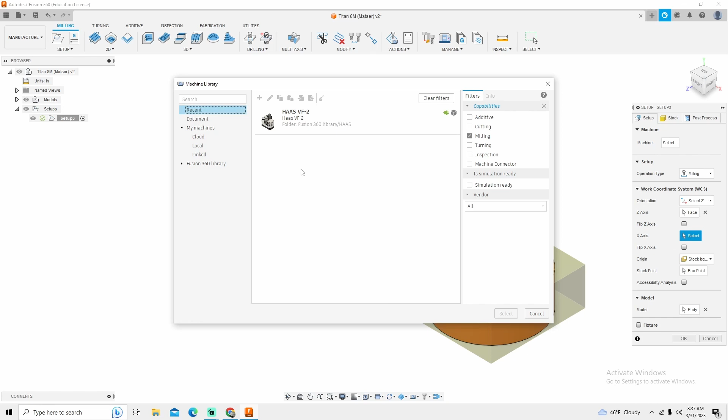Once I've got that done, I'm going to select a machine. Now, I've got a machine in my recent because this is the machine that I always use for demonstration purposes. But once you have that machine selected, it's going to ask you to download. Once you get that machine downloaded, it's going to prompt you to save that machine in your file location, and then you'll be able to see Haas VF-2 right here.

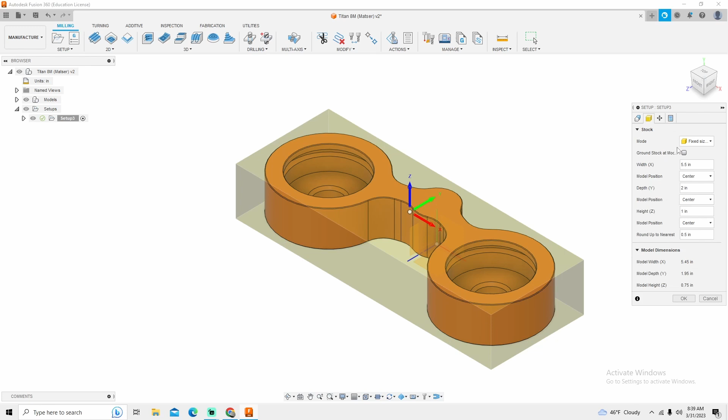We're now going to work over into our stock tab. We're going to go to fixed size box instead of relative. It's telling me that I need 5.5 inches of material by 2 inch by 1 inch. The only thing I want to verify is make sure I got material on the ends.

Once I've done that, I will then go down here to model position, offset from top, and I will change that to 20 thousandths. If you've watched my other videos, this is pretty much the same thing I do for every single part. That 20 thousandths represents 20 thousandths worth of material on the very tippy top of the part.

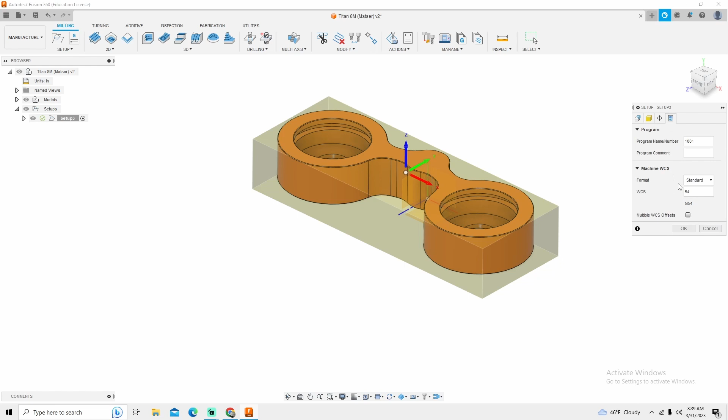Now the next thing I'm going to do is go to my post process right here. I'm going to change this program to 8000, and I'm going to call it Titan 8M. Then my format is going to be standard. Standard is your G54, G55, G56, G57, G58, and G59. And then extended is what we call on the Haas our P series, so G154, P1 through P99. So I'm going to stick with my standard G54 because I don't need anything else.

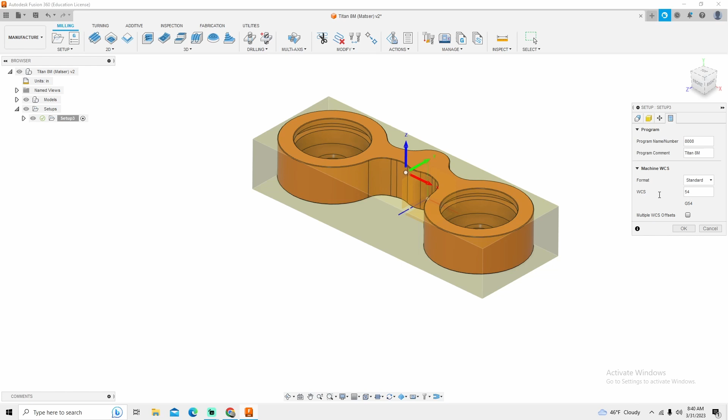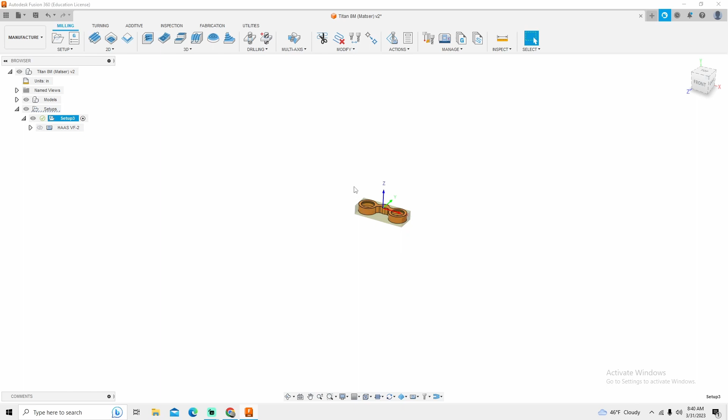And I will simply click OK. Once you click OK, if you imported the machine model, it will bring the machine model in. Now this is not the complete model. You'll have to go import a vise and everything else into your machine setup. But for the day's demonstration, I am just going to turn that machine off and continue on with the CAM process of this part. First thing that we're going to do is we're going to face the part off.

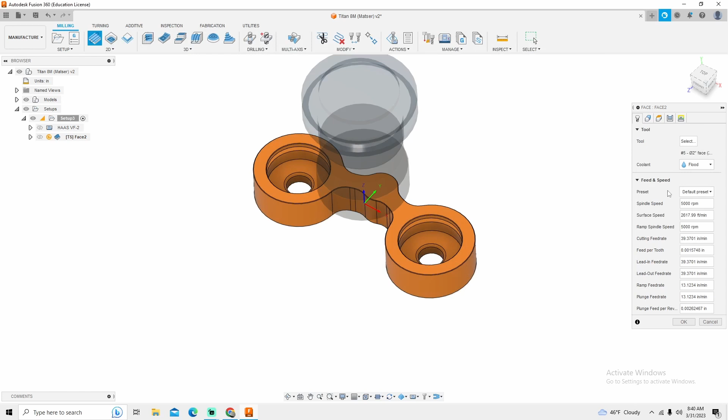So up in the facing tab, the tool that we're going to use is a 2-inch face mill that is located under the Fusion 360 library tab under milling tools. 2-inch face mill is the only one that Fusion uses. Mash select, and then we're going to change the spindle speed to 3500 RPM and a cutting feed rate of 40 inches a minute. Now 40 inches a minute on the face mill that I have at 3500 RPM will give me an almost mirror finish. Your mileage may vary depending on the kind of face mill that you have.

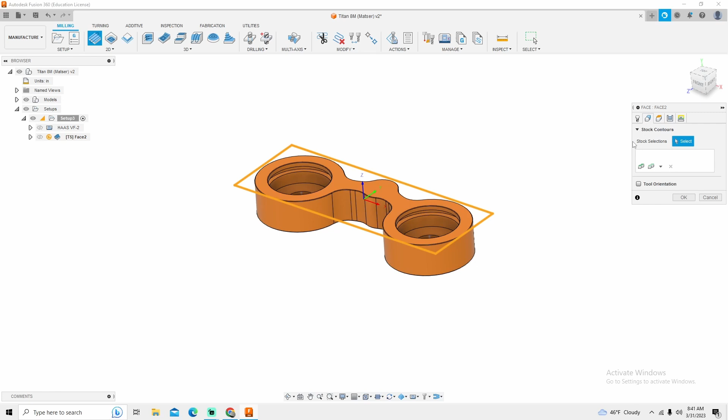Under the geometry tab, there's nothing I have to do. Same thing for most of these, except today we're going to talk about the heights tab a little bit more than we have in the past. So the way Fusion defaults is it'll give you a clearance and it'll give you a retract point. I don't like this. I like my tool to come down knowing it's only going to be 100 or 200 thousandths above the part.

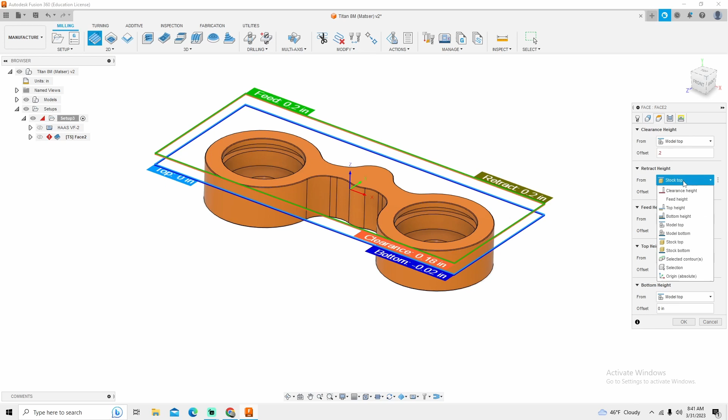So on my clearance plane, I will change this to model top, and I will change this to 200 thousandths. I will also change my retract height to 100 thousandths. And then I will also change my feed height to 100 thousandths. This tightens everything up. Now I do realize most people don't like this approach, but I do. So after I do that, the only other thing I have to do is basically just click OK. The machine control will take over and it will face the part off.

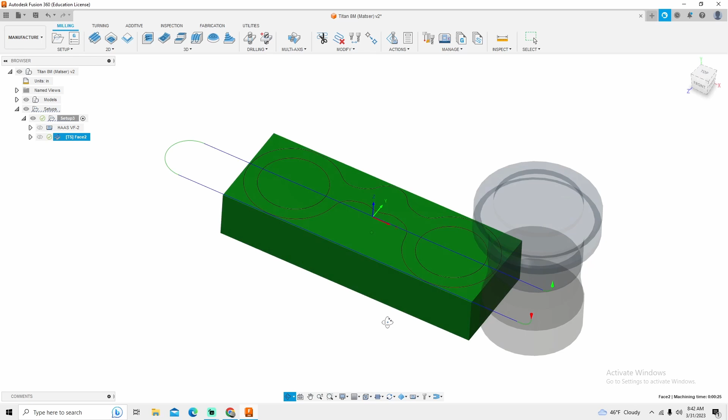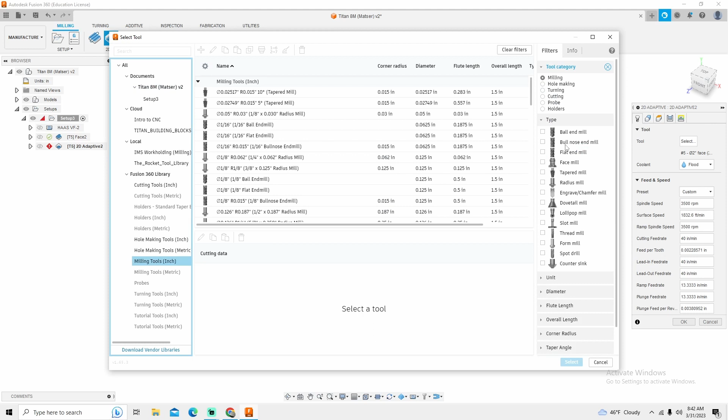Now the next thing that I'm going to do is the adaptive clearing. This is going to get rid of all of the excess material around the outside of the part. So up under adaptive clearing right here, I'm going to go in. I'm going to use a 3/8 end mill to do all of my milling work. This end mill again can be found under the Fusion 360 library, milling tools, flat end mill, and then that tool is located right here.

I will change my feeds and speeds to aluminum roughing because this part will be made out of aluminum in the end, and I will be roughing it out currently. So I'm going to mash select. I'm going to go into my geometry and I'm going to select the bottom of the part.

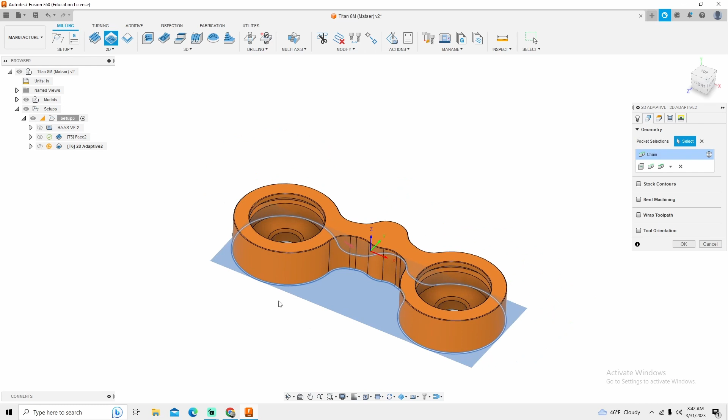Once I've done that, I'm going to click on passes and I am going to change some of these load settings. I'm going to change this to 75 thousandths. And then I am going to leave my material at 1 thousandth radially and axially. I'm going to turn smoothing on. I'm going to change that smoothing value to 1 thousandth. And feed optimization, I'm just going to turn it on and let it use the default settings.

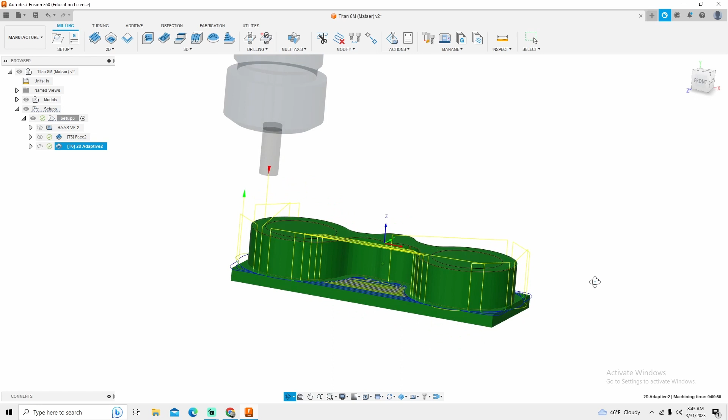Now the next thing I'm going to do is simply click OK. And there is my toolpath for the outside of my part. Now for the holes on the inside, I could do the same thing and let the tool helix in, but I can make this part a faster way by pre-drilling the hole.

So I'm going to select a drill. The tool that I'm going to use is a 1/2 inch drill. So if you go under drilling, hole making tools inch, diameter, and change equal to 0.5 and hit enter, you'll bring up a 1/2 inch drill. Now again, I'm going to be doing aluminum, so I'm going to do aluminum drilling.

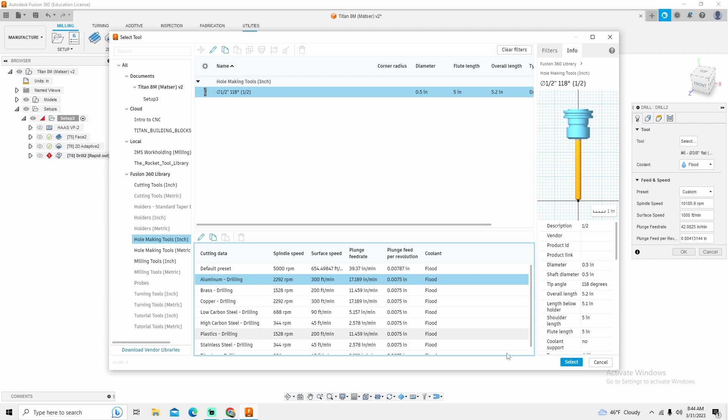I'm going to mash select, and then under my geometry tab, I'm going to select both of the hole wall diameters. Now this is going to create a problem, and we'll have to change some more things again in the heights tab. For one, the drill is not going all the way through, and it's feeding into the part. Little information about Fusion 360. Green is a feed color, yellow is a rapid color.

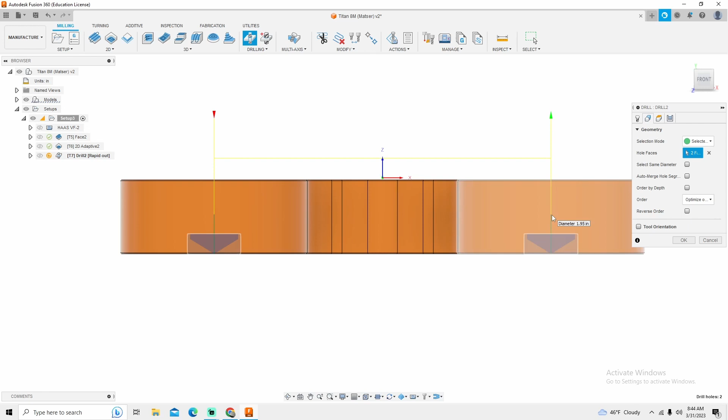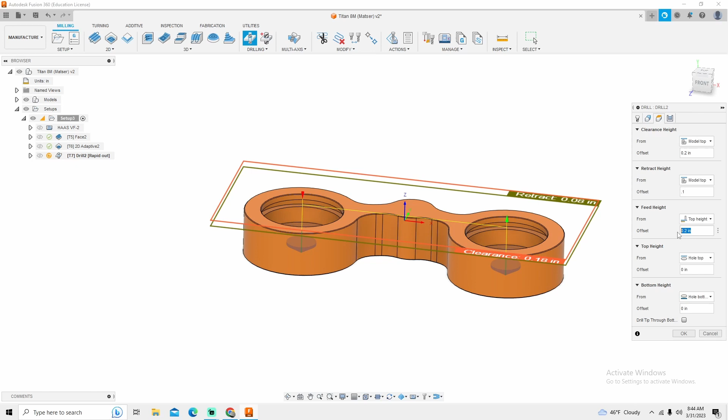So we don't want that drill to rapid into the part, so we're going to go over into the heights tab. We're going to change our clearance from model top 200 thousandths, retract, model top 100 thousandths, and then feed height to 100 thousandths. Then also on the top height, instead of hole top, we want to go to model top. And then on bottom height, we're going to click drill through, and I'm going to add an additional 100 thousandths. My drills are 118, but again, I'm drilling aluminum.

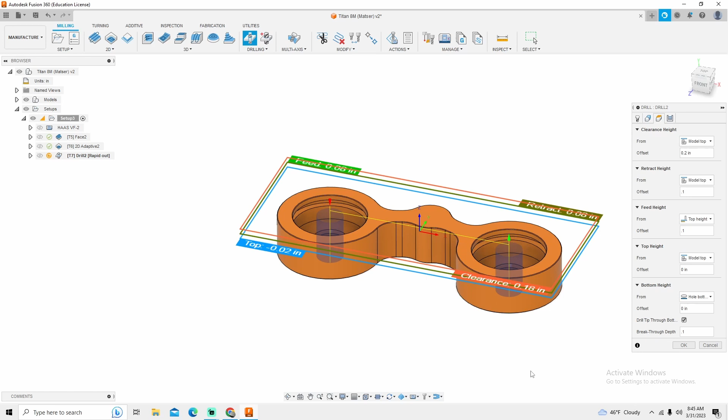And if you've ever drilled aluminum on a CNC, you'll realize that at the bottom of the hole, it wants to push the material. It's called material deformation. It's pushing the material out of the way as it's cutting it. It's cutting as much as it is rubbing in some cases. So I want to make sure I'm punching that hole all the way through. Once I've done that, I simply just click OK. Fusion will go through its thinking process, and now we have a perfectly drilled hole.

Now I can come back with another adaptive clearing cycle. I can go into geometry and select the bottom of those holes. I can then go over to passes, change my optimum load to that 75 thousandths as before. Again, 10 thousandths axial and radially. Turn smoothing back on at the 1 thousandths I typically do, and feed optimization. And if you do anything wrong in Fusion, it'll gladly point it out and highlight it red. Instead of 750 thousandths, I wanted 75 thousandths.

Also in the linking tab, if we didn't pre-drill the hole, we would have to either helix or ramp in, because you don't plunge with end mills. You're not supposed to plunge with end mills anyway. So instead of helix, I'm going to do plunge. Now, I don't want to rapid into the hole. Just in case something happens, I want a little bit of time to stop the machine. You know, if a drill breaks off or something and I can't quite get to the machine quick enough. So I'm going to change it to plunge, and then I'm simply going to click OK.

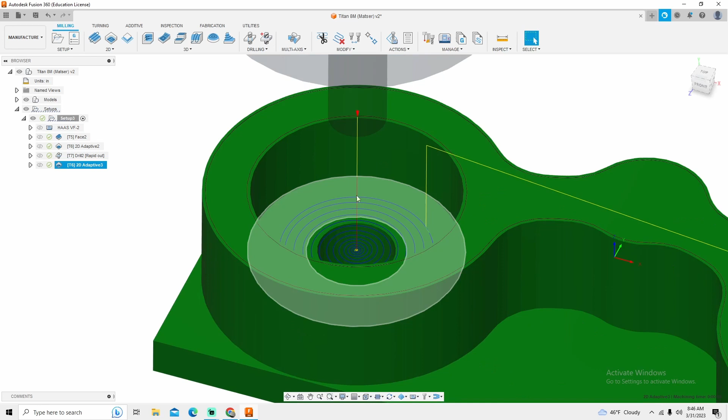Now Fusion 360 is smart enough to realize there's a hole in that part, and you'll see right here we have that yellow line indicating it's plunging down, and then the tool is feeding out. So at this point, I need to finish the part. So I will go into 2D contour. I'm going to use the same tool in my setup. I would advise you using a different tool. You don't want your roughing and your finishing tool to be the same in case your roughing tool becomes damaged in the material removal process.

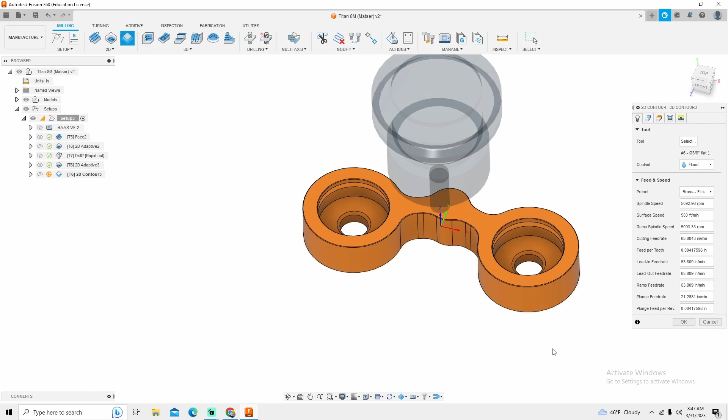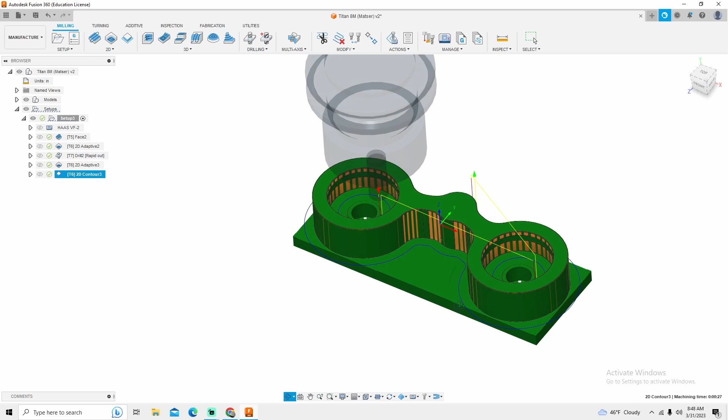Again, I'm going to go into my heights tab, and I'm going to change this to model top 200 thousandths, retract 100 thousandths, and feed 100 thousandths. Then I can simply just click OK. Not too much here to do. Now you will see how that tool decided it wasn't going to clean it all up.

So to change that, and also I want to clean this up out here a little bit more as well, we can right click, go back into edit, go into passes, turn roughing passes on, maximum step over 300 thousandths, and do. Now that tool comes in and it actually cleans everything up the way it was supposed to. So now at this point, the only thing I have left to do is to cut this undercut in. So if I click off, you'll be able to see this undercut.

We call this a keyway groove, snap ring groove, and then we have to put some chamfers on it. So the first thing I'm going to do is the chamfers because that's the easiest, and we've done this before. So we're going to go into the 2D contour.

The tool I'm going to use is found in the Fusion 360 library, under milling tools, engraving and chamfer milling, this 1/2 inch tool right here. I'll select it, then go into our geometry tab and select the bottom of our chamfers. This is the easiest way I've found to do chamfers in Fusion 360.

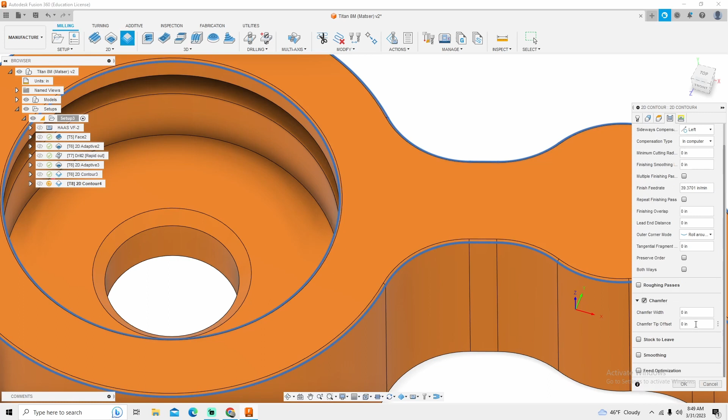Over in our passes tab, the only thing we have to do is set a tip offset, so we're not running on the center of the tool. I'm going to use 50 thousandths in this instance, and then simply click OK. That puts our nice pretty chamfers on our part.

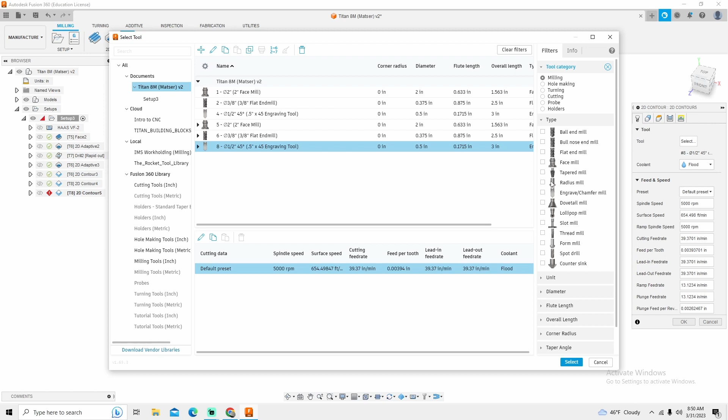Now the last thing to do is this undercut, or keyway groove. You can go into Fusion under contour, and Fusion may have some keyway tools in here. They're calling it slot mill, and they have two of them. So I don't know if these tools meet what we need.

I'm going to first go to this tool, right click, view tool, and look at the specs of the cutter. The flute or shoulder length is 31 thousandths. This cutter will not work.

However, if you take a brief moment and go online, you can find a cutter that will work. In this instance I'm on the MSC website, one of the largest metalworking sites you can go to, and I found a Harvey Tool Woodruff key seat cutter, 1/2 inch shank and 125 thousandths width. That means the tip of this tool, the business end, is 1/8 of an inch. This is the cutter I'm going to model mine off of.

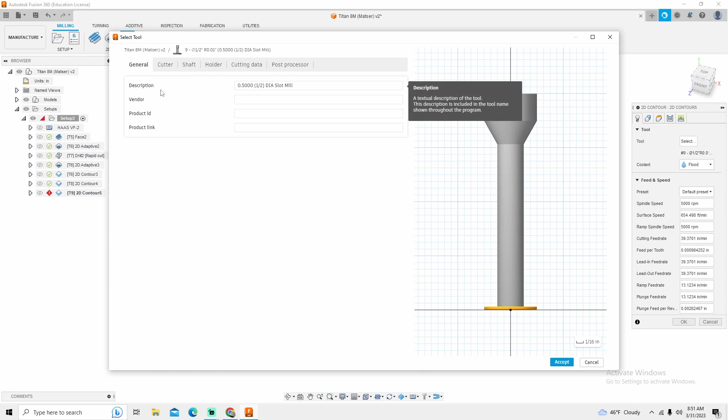Going back into Fusion 360, this one already has a 1/2 inch shank, already plenty long enough. So I'll select that tool, go back into select right here, then right click and edit that tool. You have to pull the tool out of the library before you can edit it. I'll go into the cutter, and this is where I'll make my changes.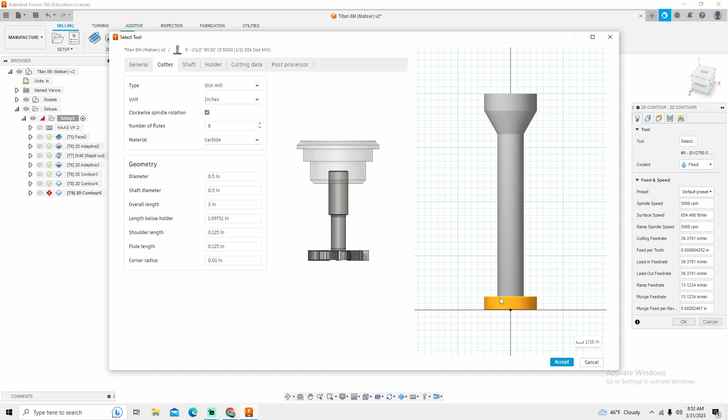My shoulder length and flute length need to be 125 on the flute, and shoulder length I'm going to change to 1 inch. That's obviously wrong, so I'll change that to 125 thousandths. Now we have a key seat cutter modeled very closely.

The only thing I'm going to do is go back and double check to make sure everything is right, and it appears to be. So I'll click accept, select, and then under my geometry tab I'll select the bottom inside part of that groove. Then I'm going to go into passes.

I'm going to do roughing passes because plunging a cutter that deep into aluminum is not a great idea, especially on a Woodruff cutter. Aluminum can be kind of gummy, so I'm going to do a 50 thousandths step over. I'm at least going to do one.

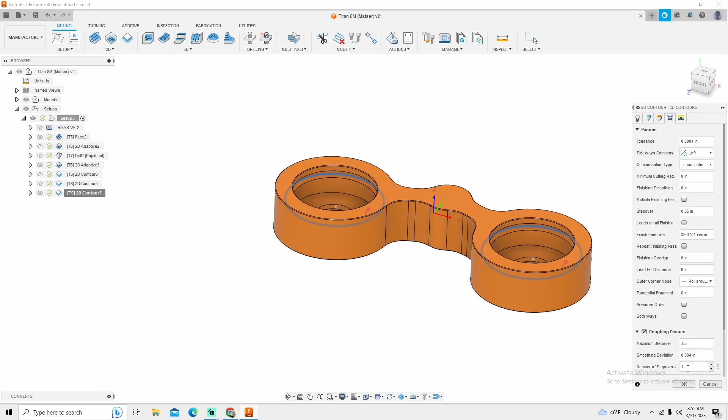I'm going to go into linking and make sure my lead in and lead out is turned on, then simply select OK. Now you can see our toolpath is there.

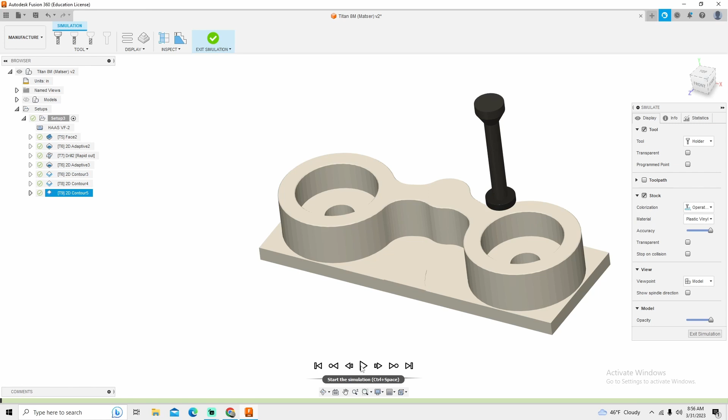If we simulate just that toolpath, we can see the cutter is acting properly, entering into the cut and making its way around. It's going to do two passes.

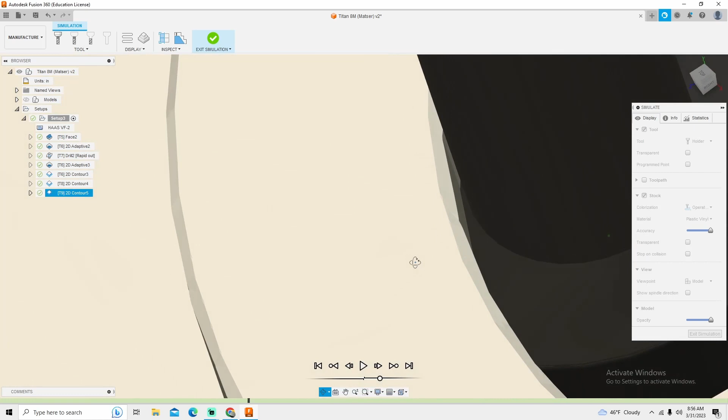One thing you always want to check is to make sure that when your cutter is at full depth, it's not hitting anything. In this instance it's really close, but there is clearance between the shaft of the cutter and the wall of the part. The shavings on a key seat cutter come out the back end, so you shouldn't have a problem.

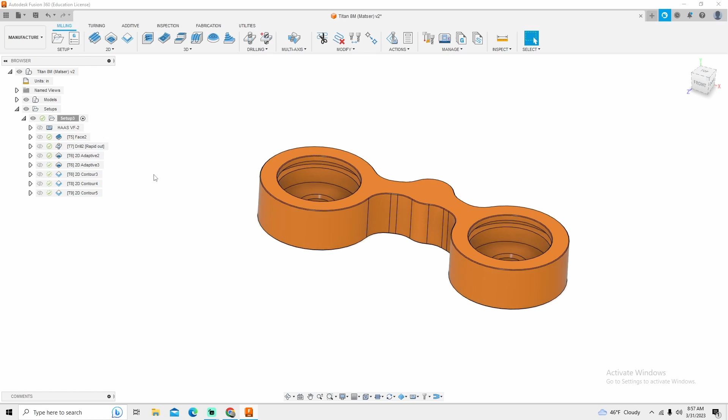Once I've done that, this part is completed, except I'm going to make one minor change, and drag my drill above, because of order of operations. We're going to face, drill, and then do all of the contouring and finishing, and I'll do my chamfers last.

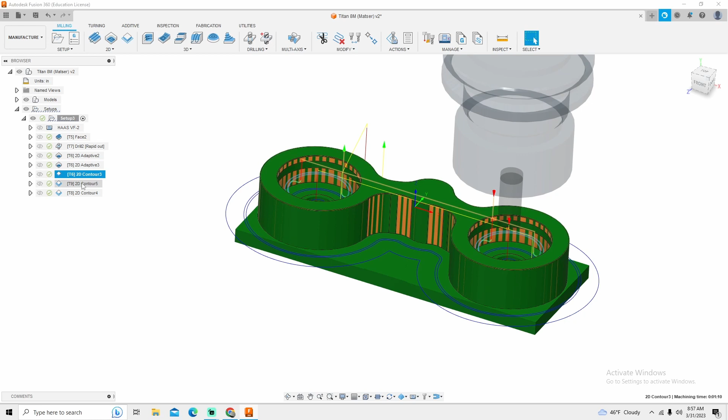Make sure that's in the right spot. So we have tool 5, which is my face mill, tool 7, which is my drill, and tool 6 doing all of my machining for material removal and finishing. Then I've got my key seat cutter and my deburring tool.

So that's basically going to conclude it for this part. The only new thing we really went over was this operation right here.